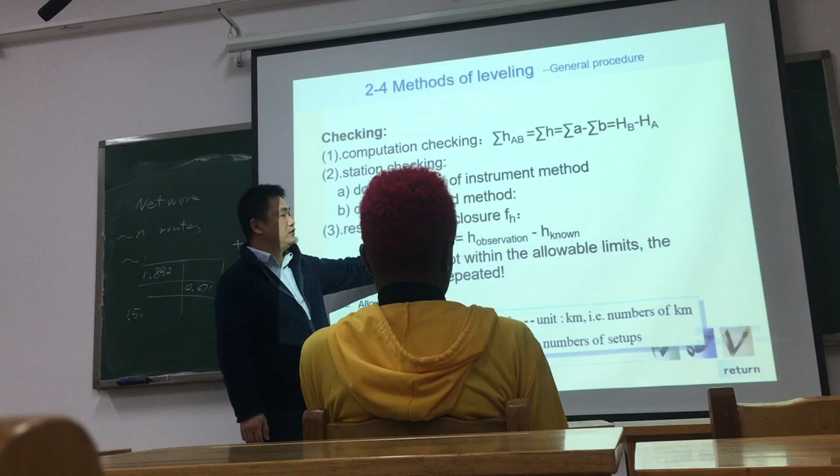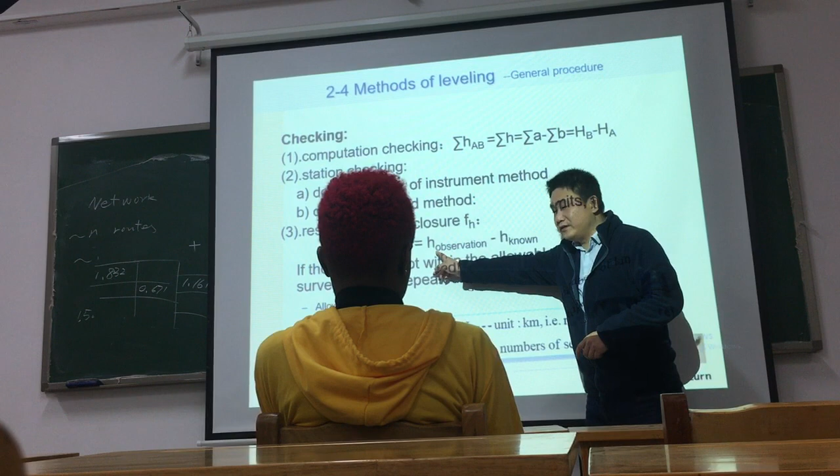We call this a misclosure, M-I-S-C-L-O-S-U-R-E, misclosure. The misclosure equals the elevation difference observed minus the elevation difference given.

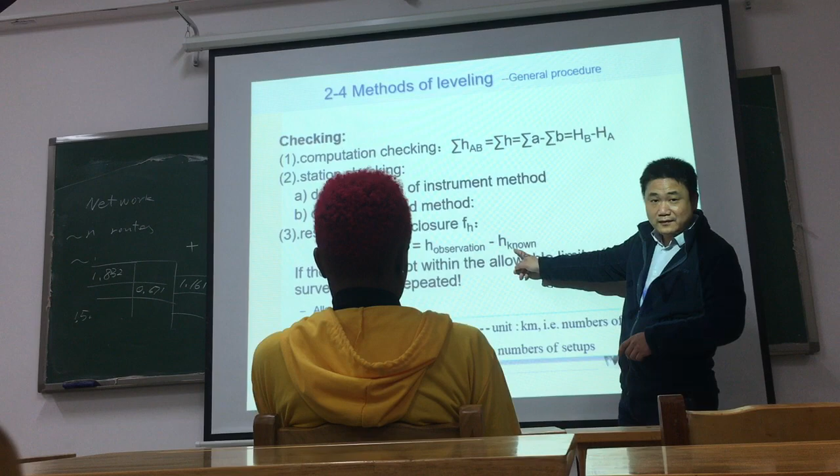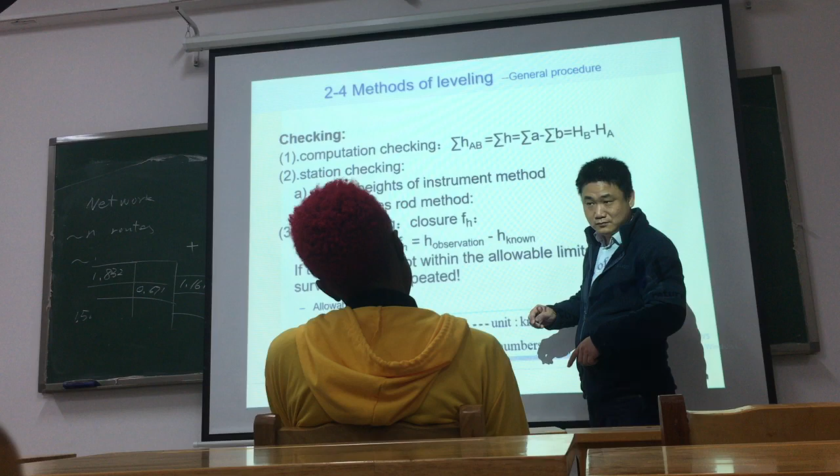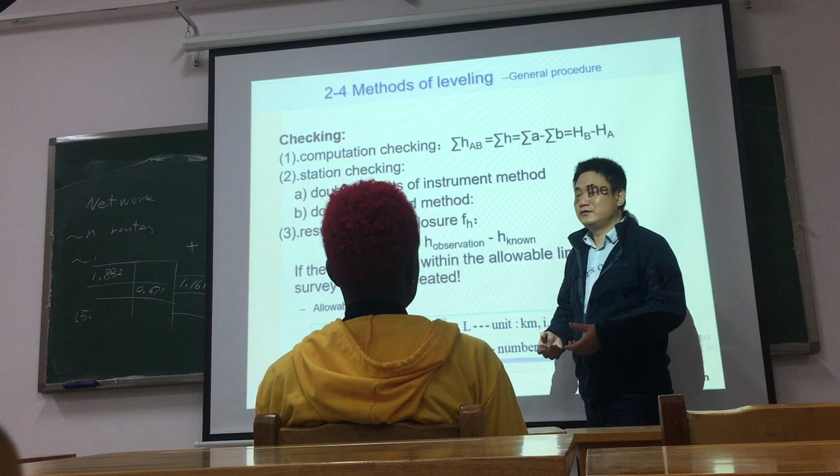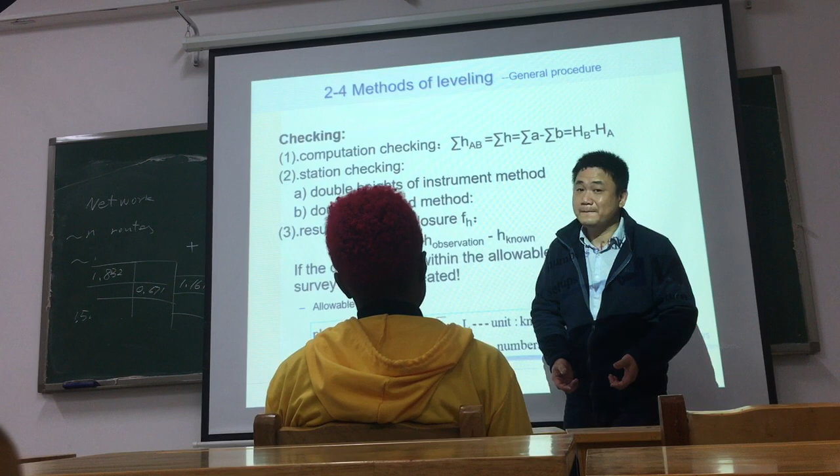For the loop route, of course here the elevation difference given is what? Zero, because the starting point and the ending point is the same point. So the elevation difference given is of course 0. So when you finish your observation, each section you get an elevation difference. The sum of them should also equal 0 in theory. If not, that means there is some misclosure in observation.

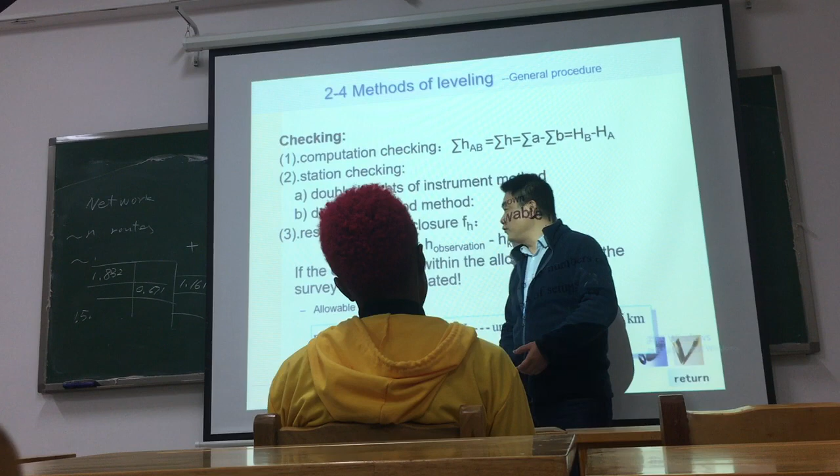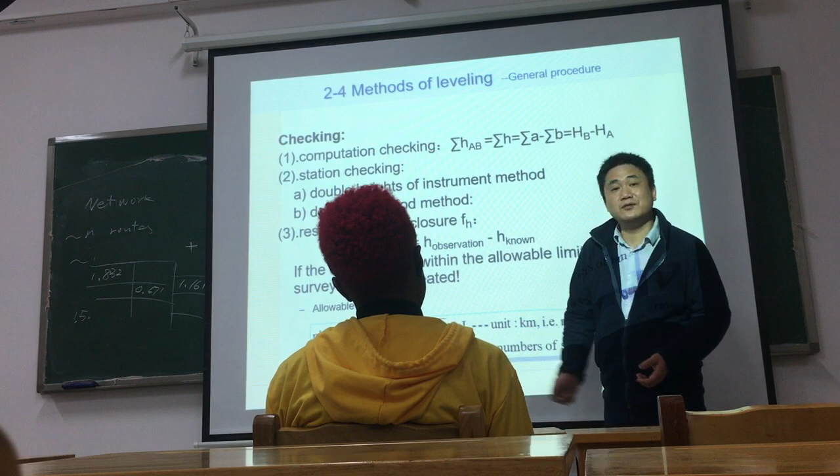This is misclosure. For the line leveling route, h equals elevation of ending point minus elevation of starting point. So for each section's elevation difference, you add them up and get the sum, then minus the h in theory. So you can get the misclosure. This is for the line leveling route.

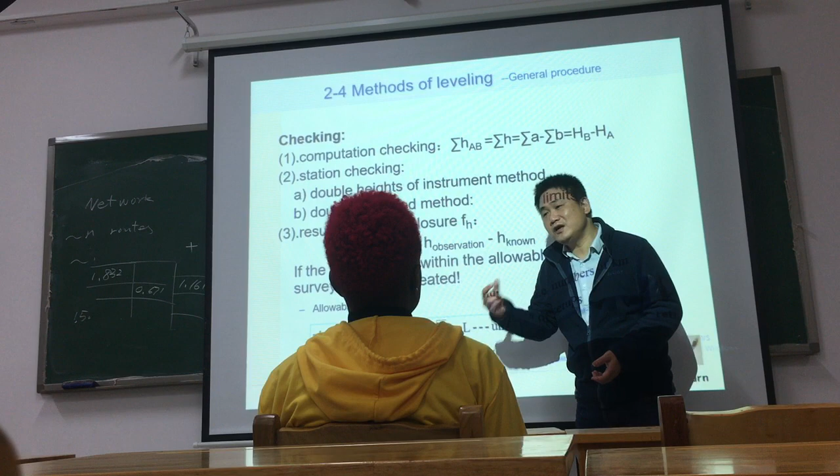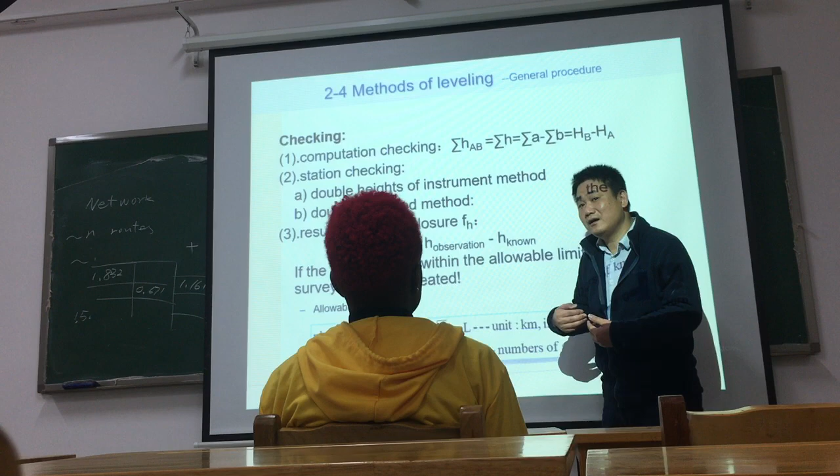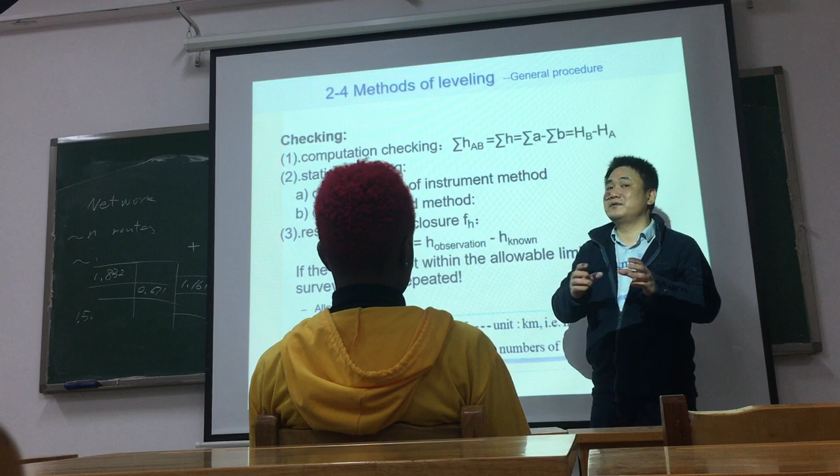For open-ended, it's easy. That means for each section, the elevation difference going should equal in value the elevation difference coming back, but one is positive and one is negative. That means for each section, the two directions, going and back, the sum of them should be equal to 0.

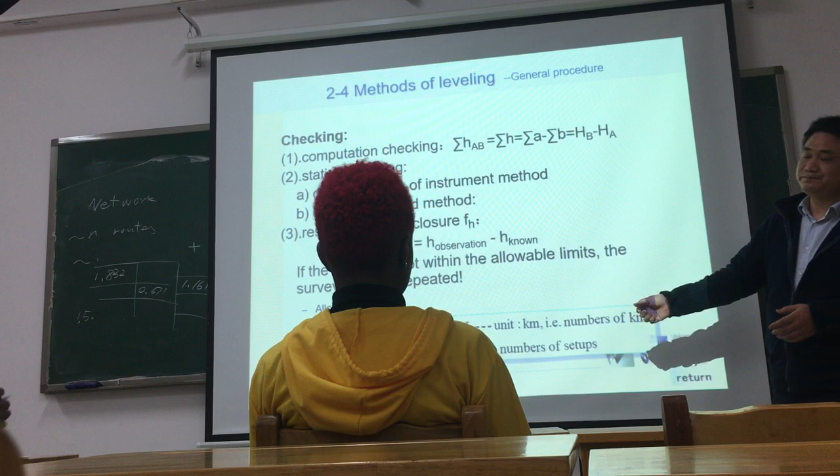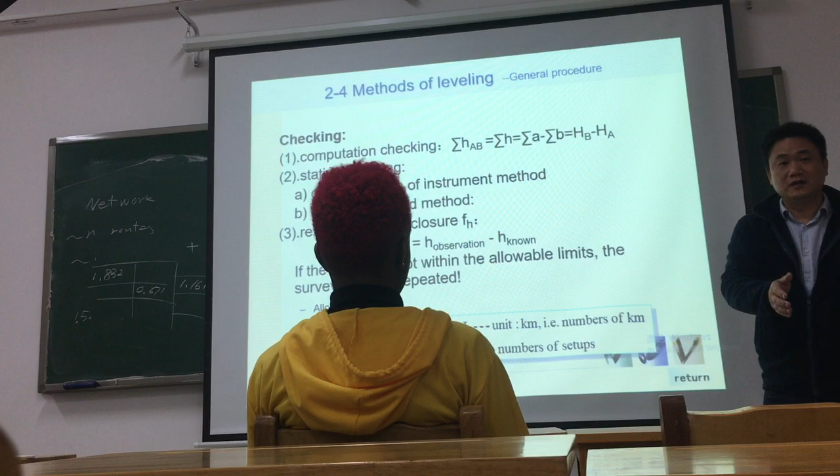So if the misclosure is not within the allowable limits, we say the survey must be repeated. Of course, if you can find which section you made a mistake in, you repeat that section. If you cannot find which section, that means the whole work should be repeated.

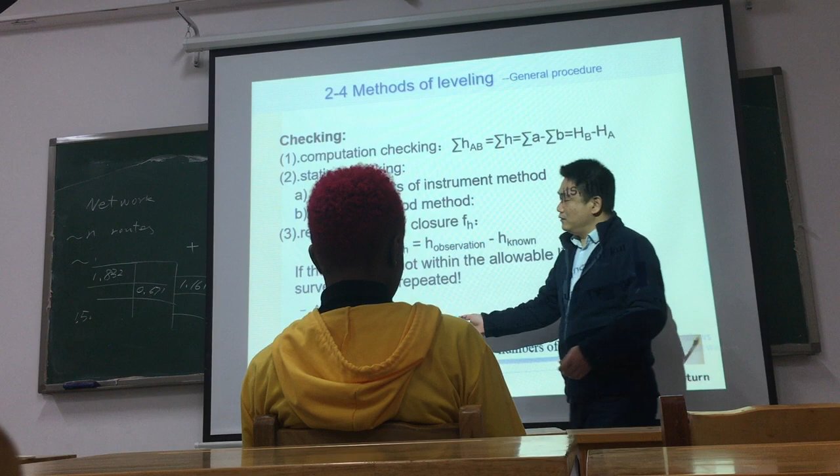About the allowable limits, of course this should be according to different specifications, different specifications of different projects, and different in different countries.

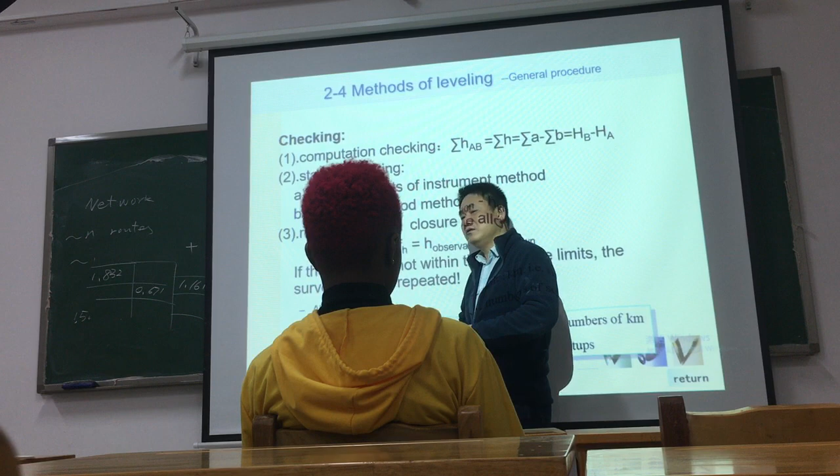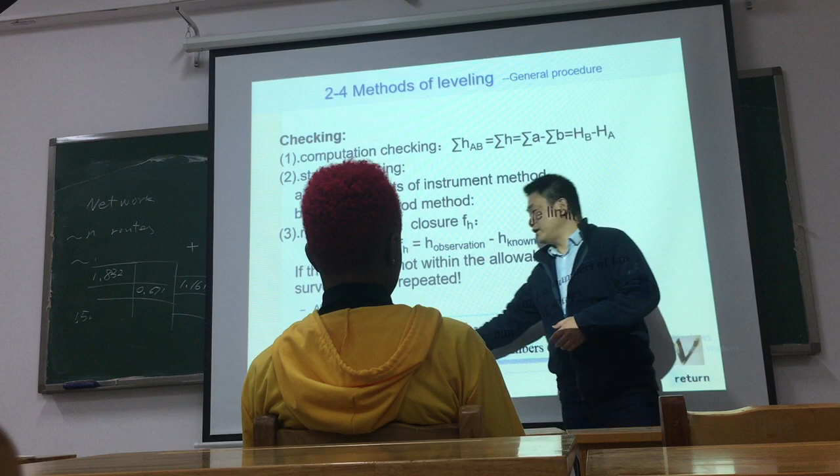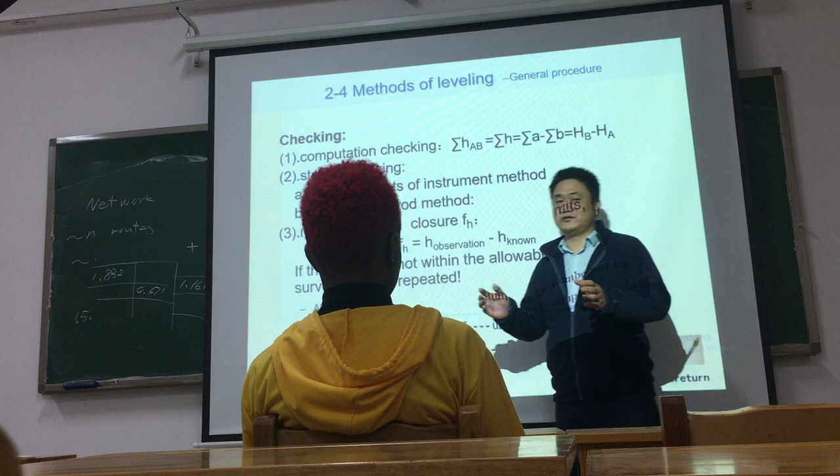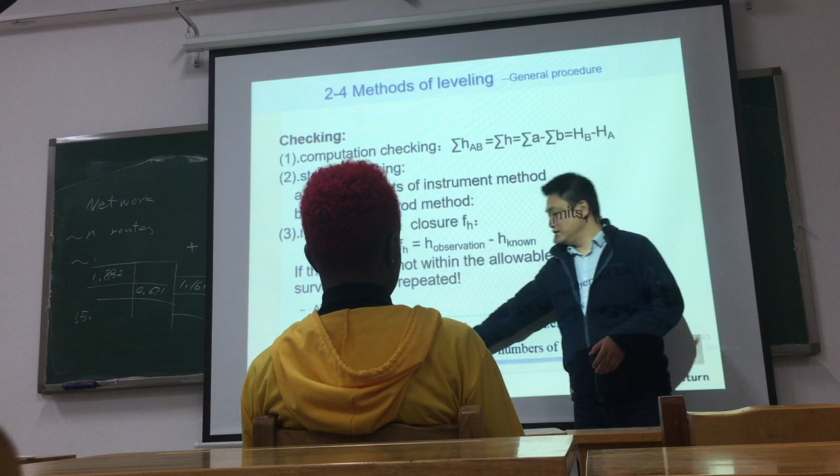For normal precise leveling route, usually we have different formulas in the plain area and in the mountains. In the plain, because each station's distance may be roughly equal, we use the length of the leveling route to calculate the allowable misclosure. In the mountains, because each station's distance may be obviously different, we use the number of stations, number of setups, to calculate the allowable misclosure.

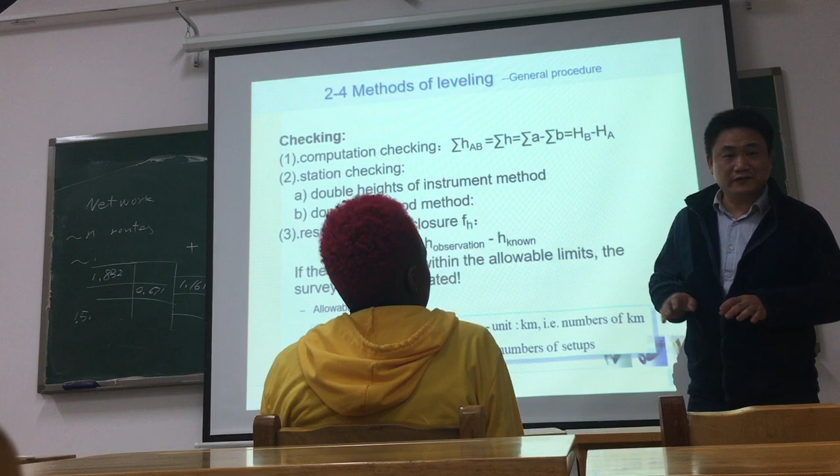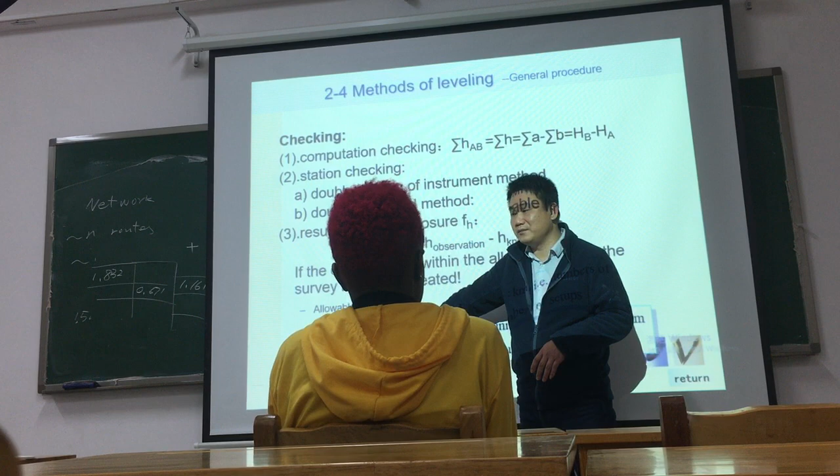Of course, in high order, high precise leveling routes, usually we will not use this kind of formula, we just use the length to calculate the misclosure allowable limits. For example, first order, second order leveling routes, we use this formula, though the number here is smaller.

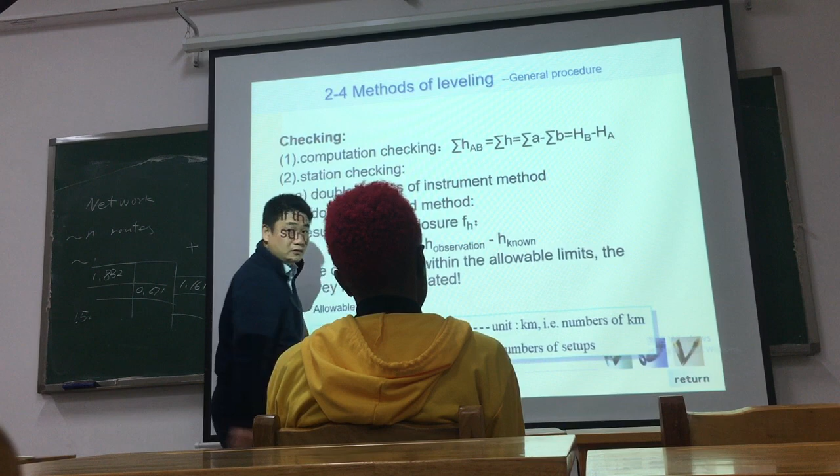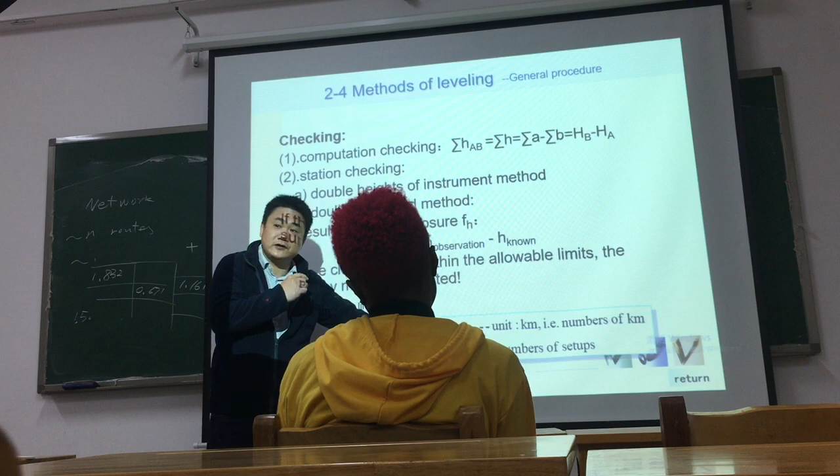The unit is millimeter. The result's unit is millimeter. But here, the unit is kilometer. Here is the number of stations. If you finish one leveling route, you can use this to calculate the limits.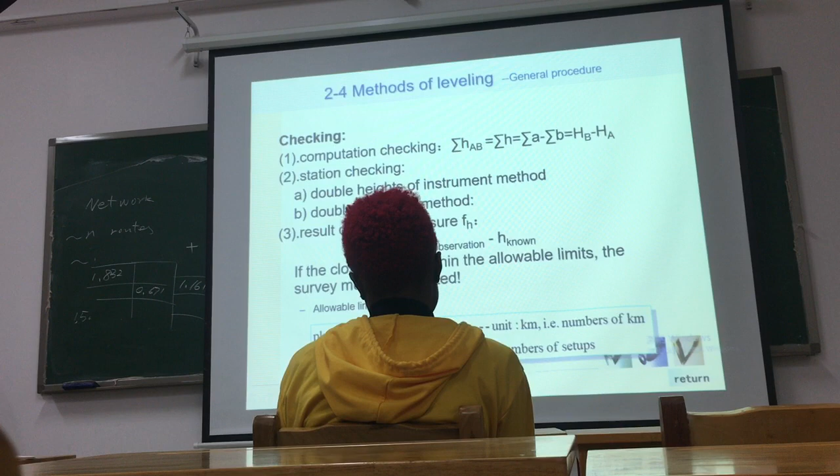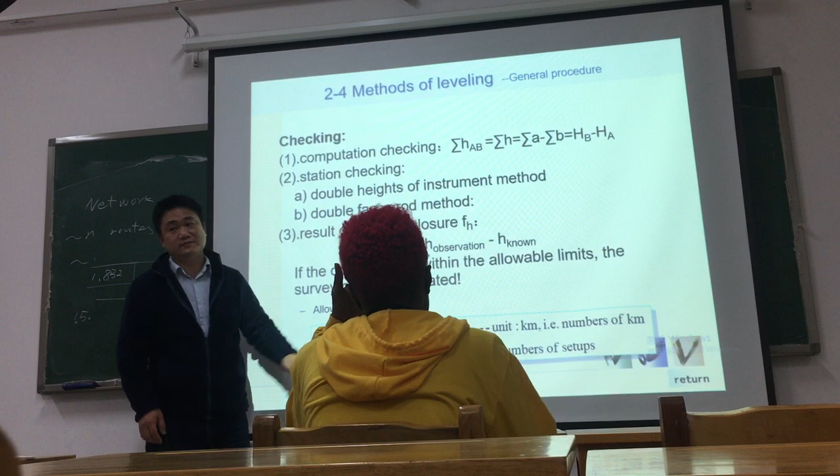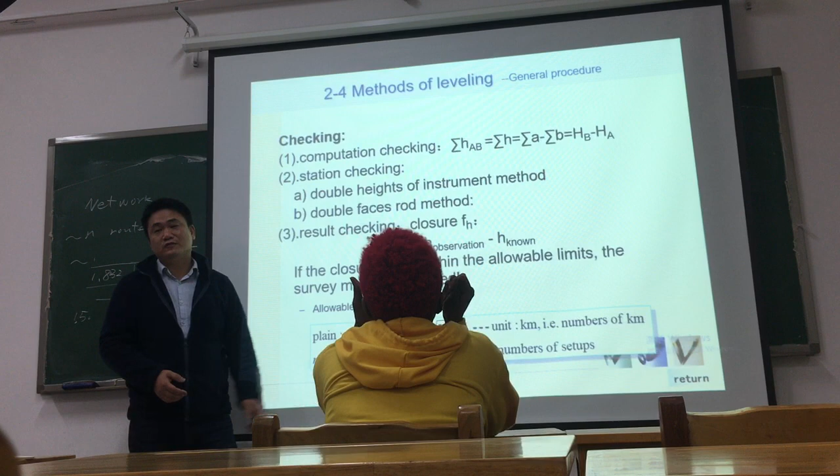If the misclosure you calculate is less than this allowable limit, that means the work is reasonable, it's okay, it's a good job, so you can finish that. But if it's not less than, if it's bigger than the limit, you must repeat that. Okay, this is the checking.

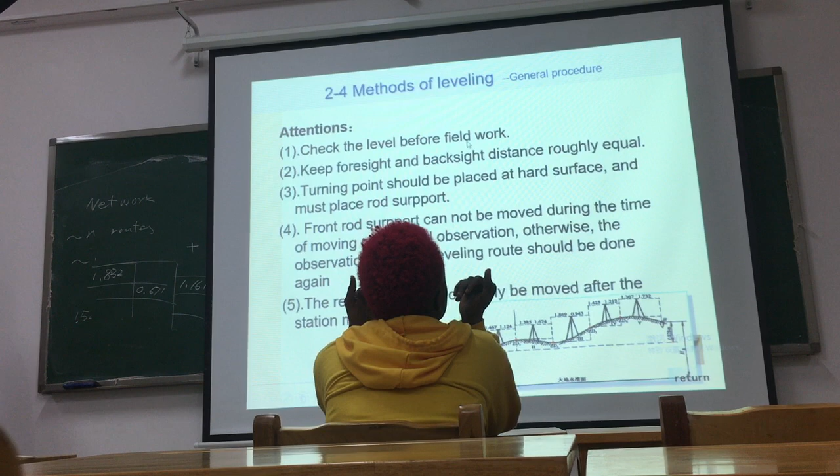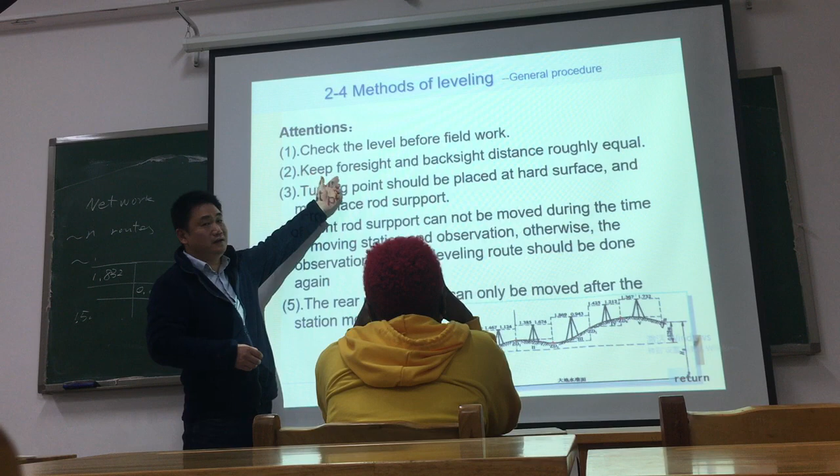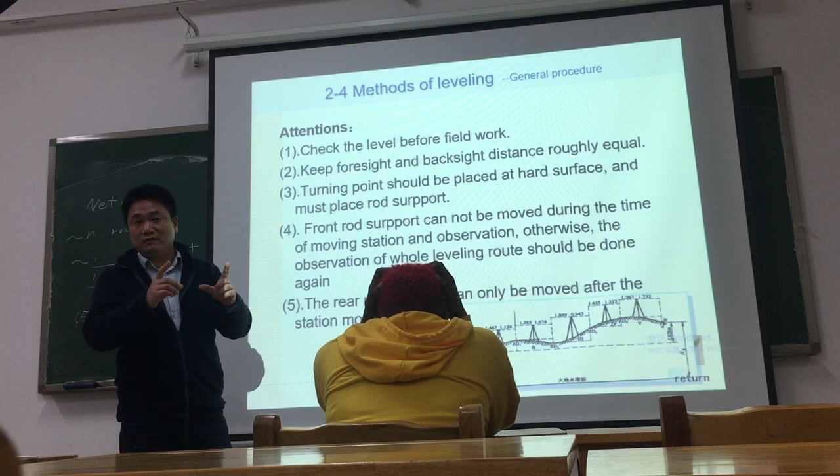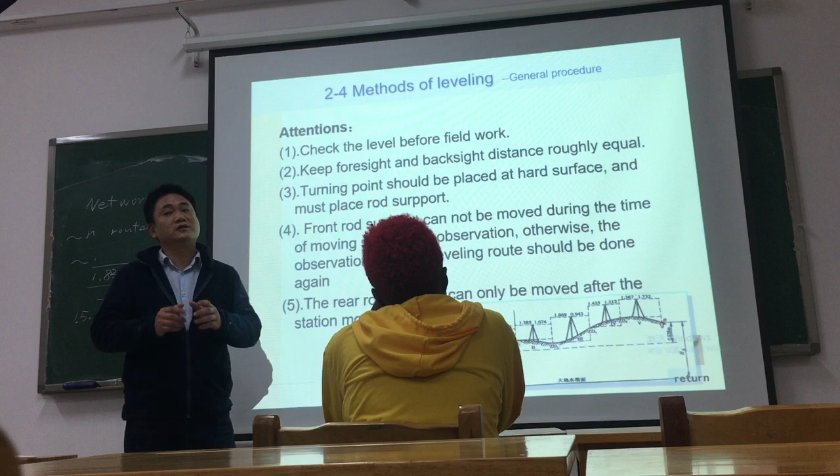Some attention points: firstly, you should check the level before field work. In fact, in survey, for each kind of instrument and field work, we should do this first. For example, in China, for each kind of survey instrument, you should check the instrument and get a certificate card for it, and this card has a period of 1 year. Beyond 1 year, you should check again. If you do survey without this certificate card, that means you did not obey the laws.

Especially nowadays, if the project you charge breaks down or has an accident, especially one that makes people lose their life, you will be put in jail.

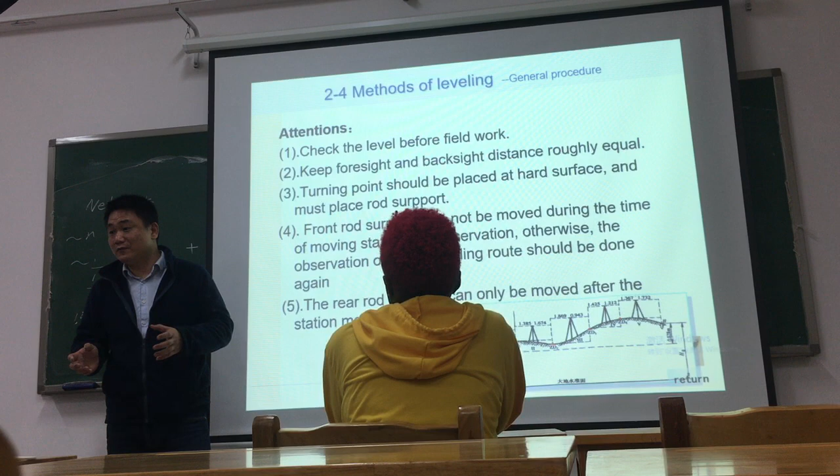For example, if you build a subway, because the subway stations firstly you should dig a big hole, very deep, sometimes digging this big hole will cause a collapse, so someone may lose their life. In this situation, the survey engineer usually will be put in jail because you must survey and monitor the deformation of the earth.

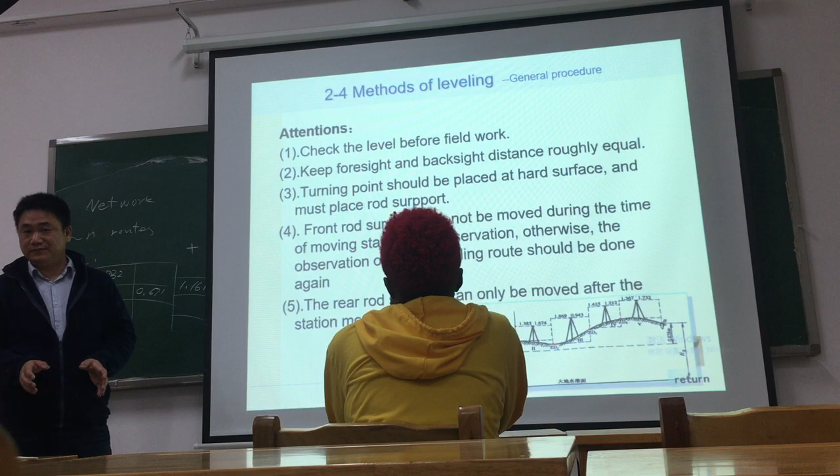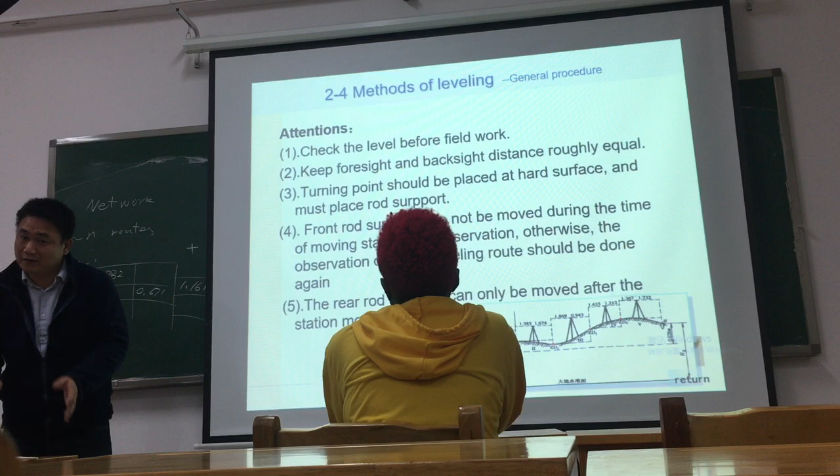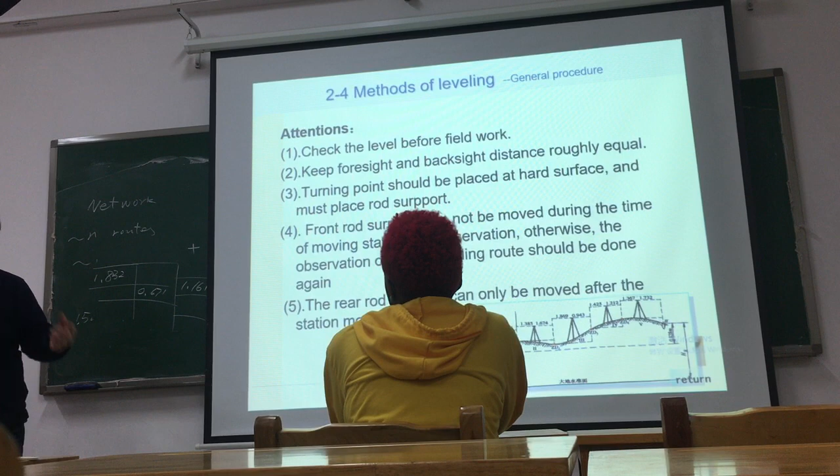Of course, this is your work, your responsibility. If you find the deformation of the earth using the instrument with certificate card and the right method, and you report it, of course it's not your mistake. But if you find it and don't report, or you didn't find it but it happens, then you'll have responsibility.

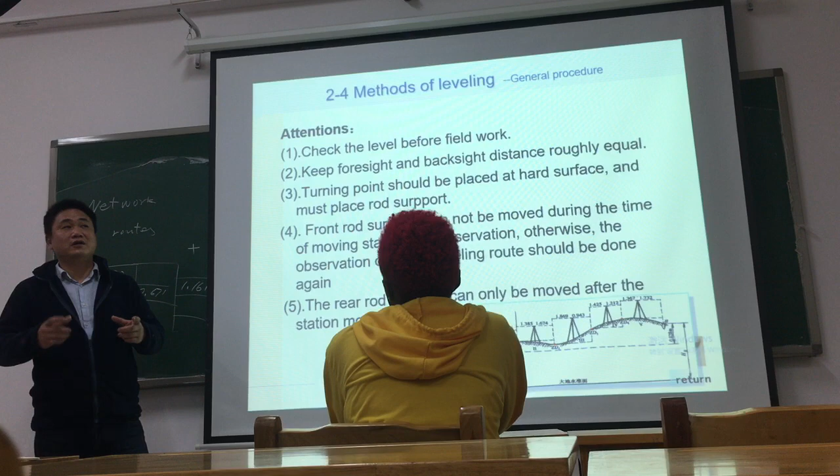It happened in Hangzhou, Guangzhou, many years ago, several years ago. For example, just 2 years ago, one subway station, I was in charge, just before Huochenan South Railway Station, one subway station. I was in charge, so every day I was very careful, very serious, for about 2 years.

And then the second point, of course, for this, I have another one. That means in your country it may be different, but in China, for each kind of instrument, every year you should check it and get the certificate card.

Keep the foresight and backsight distance roughly equal. Of course, in the experiment yesterday, we didn't obey this, but in the third experiment, we must do like this.

The turning point should be placed at a hard surface and must use a rod support. This is for the turning point. You should remember the function of the turning point is to transfer the elevation.

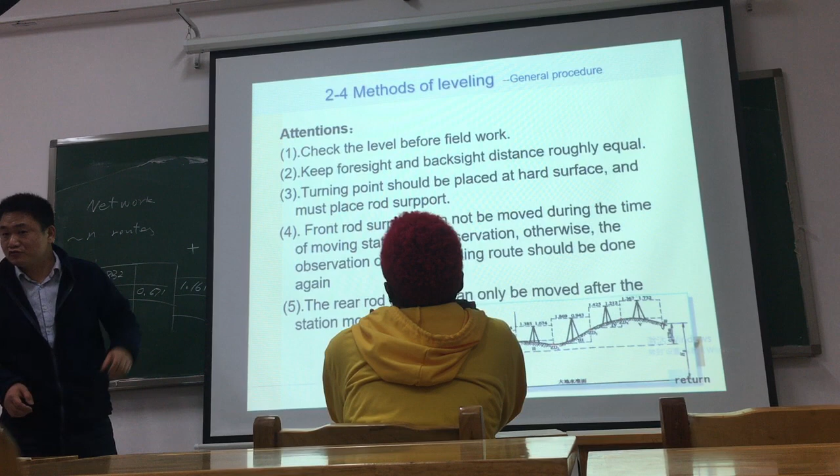The foresight rod support cannot be moved during the time of moving the station and observation. Otherwise, the observation of the whole leveling route should be done again.

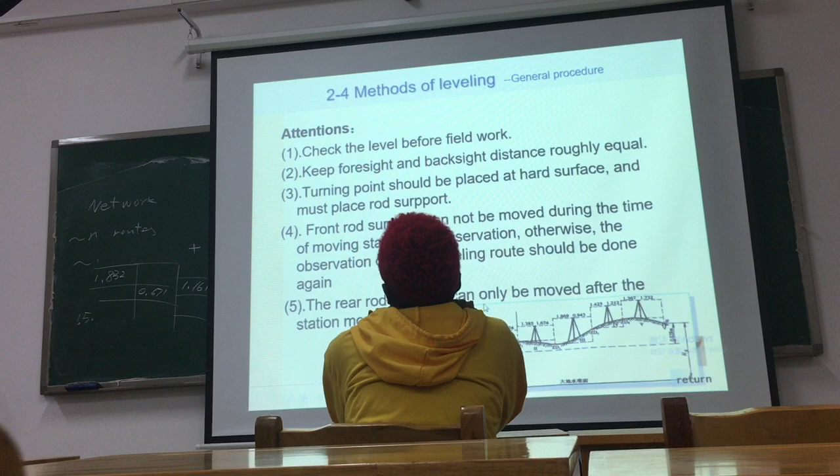The backsight rod support can only be moved after the station moves. That means when you finish one station, the person in charge of the instrument should never call back the person in charge of the backsight rod. Leave him alone. When you move, of course, he will move too. This is some attention points.